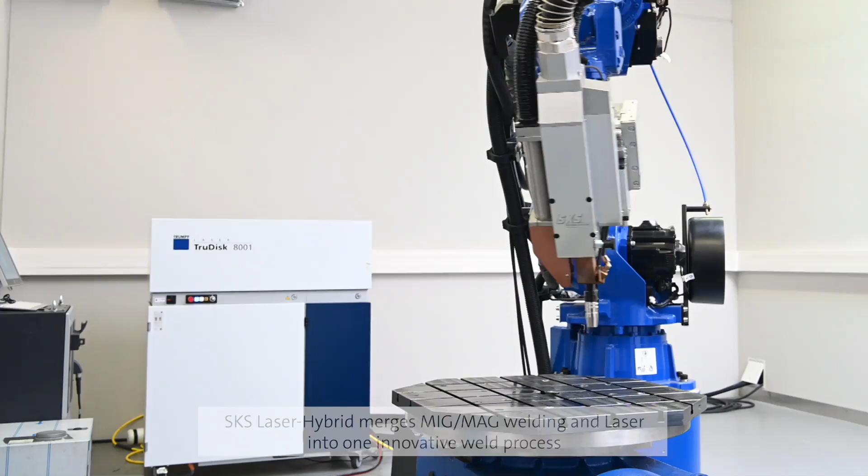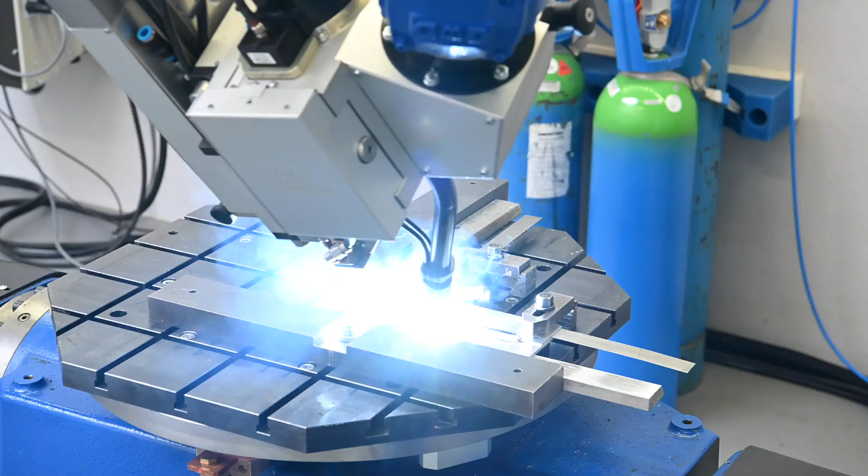SKS Laser Hybrid merges MIG-MAG welding and laser into one innovative weld process for very high welding speeds and extremely stable joints. Laser Hybrid combines the dynamic of the MIG-MAG process with the constantly high power of the laser beam, and thus opens the door for multiple new applications.

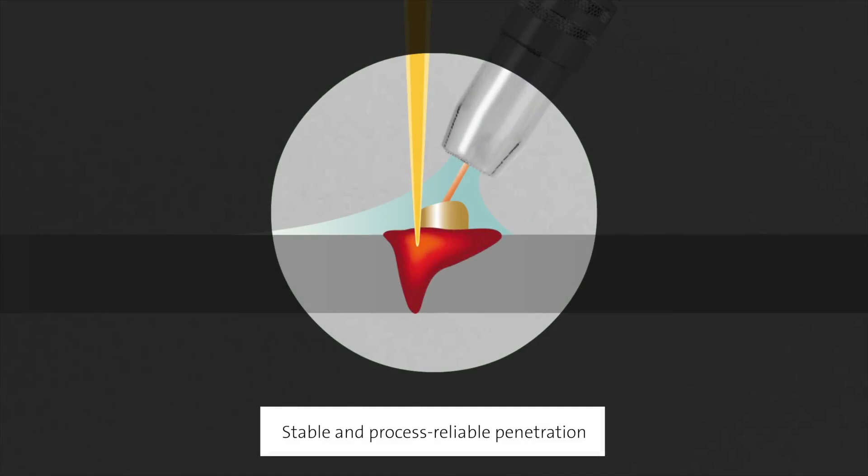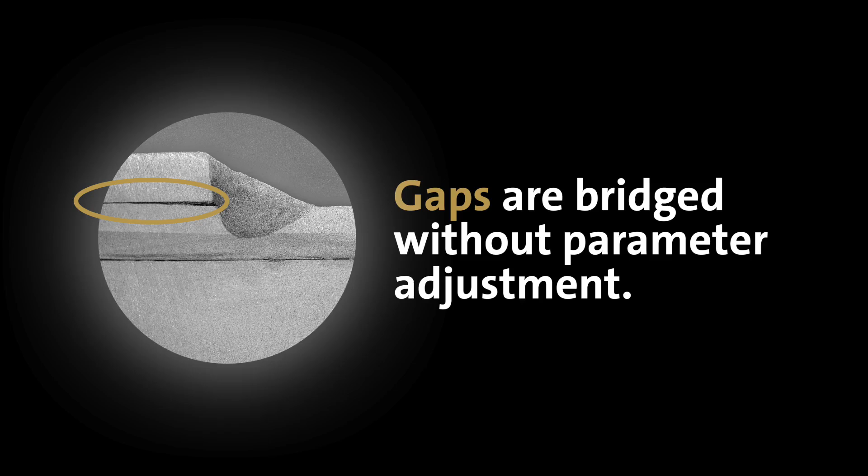In the Laser Hybrid process, the laser focuses its energy on a small area and thus generates a stable and process-reliable penetration. At the same time, the exact amount of filler material is fed into the joining zone with the MSG welding process. Gaps and other component tolerances are bridged in a controlled manner without parameter adjustment and ensure the required seam characteristics.

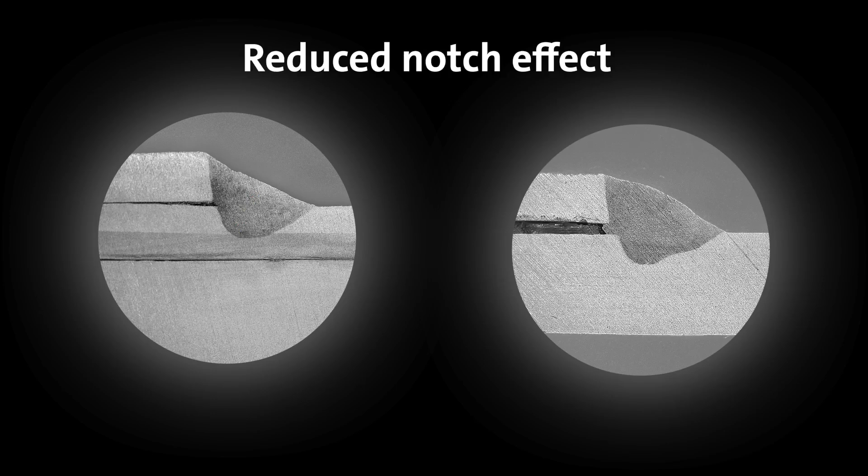Excellent seam quality, visible in the micrograph. Reduced notch effect. Flat weld seams with only low seam rise and deep penetration up to full connection.

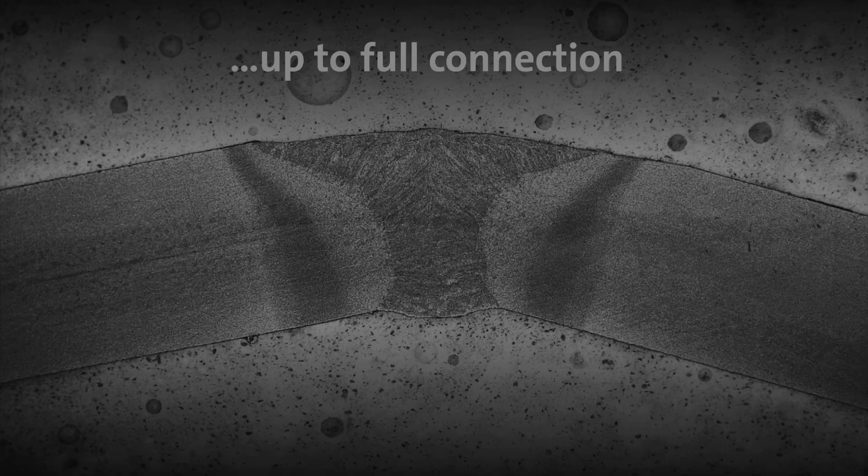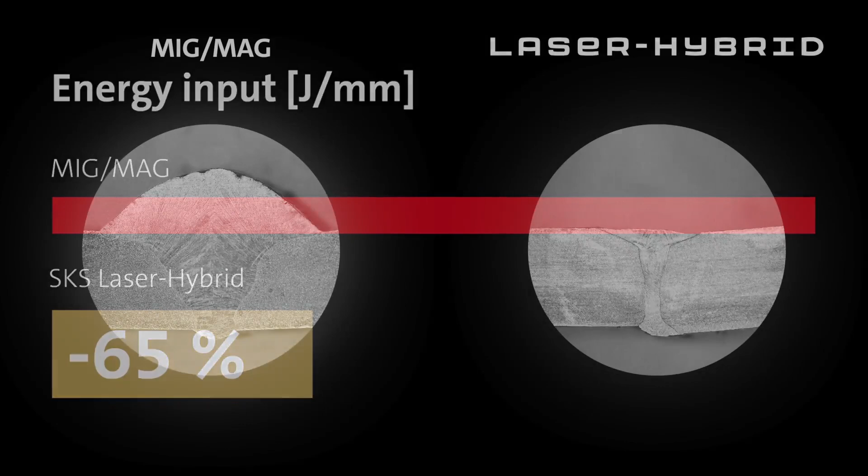Laser Hybrid allows a 5 times higher weld speed in direct comparison to MIG-MAG welding, reduces the energy input by 65%, and lowers the use of filler materials by 50%.

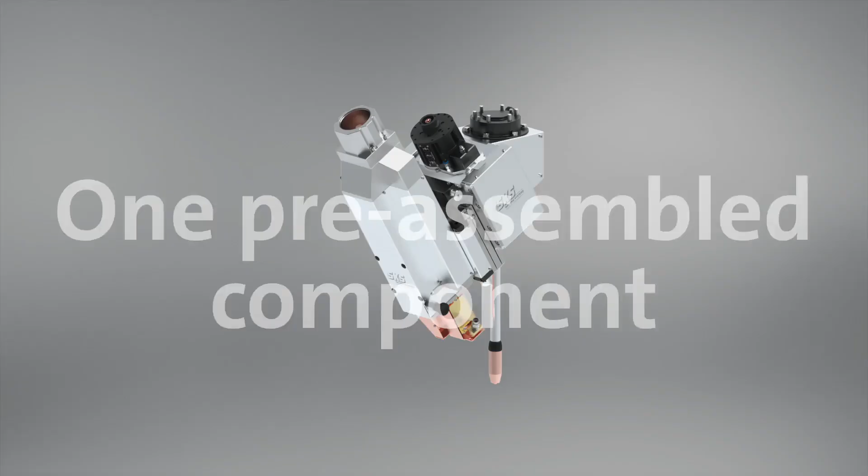We keep it simple. The torch head is supplied as one pre-assembled component in a dust-protected housing. If single parts are changed, TCP is kept identical.

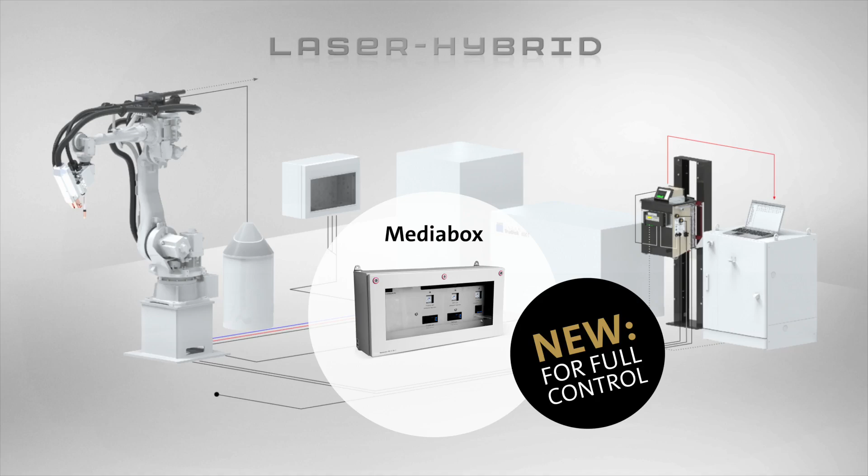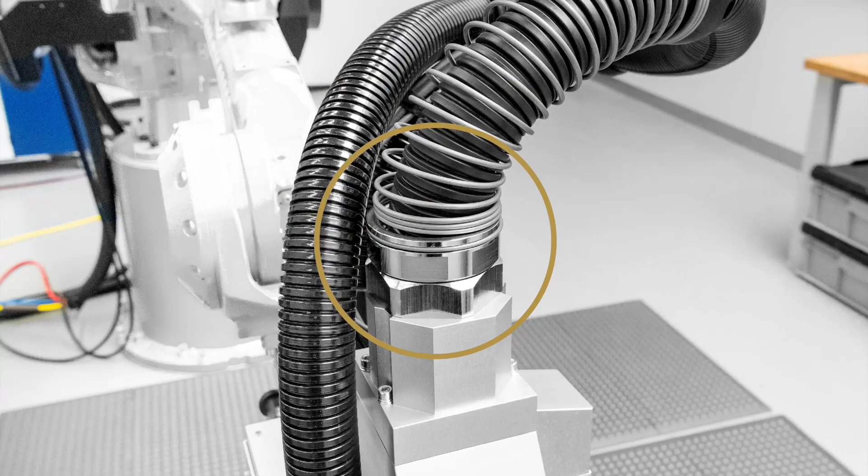The Process Laser Hybrid works in perfect setup with the modular SKS weld system, exclusively realized with components from our standard weld packages. Plug and play. SKS connection kits allow a simple mounting and optimized cable guidance on the robot for high durability and maximum freedom of movement.

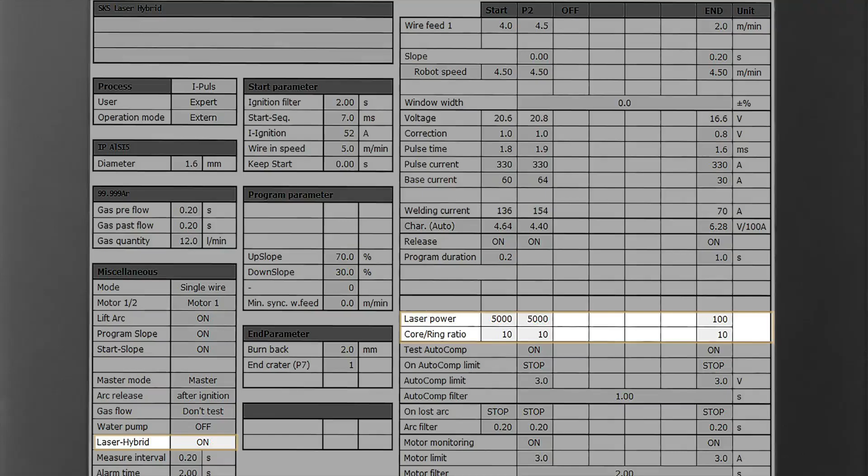Simple programming and process control. Everything in view with the license-free software Q8 tool. The parameter settings and the laser are completely integrated in the SKS software, as well as the documentation of all measures and the robot TCP speed.

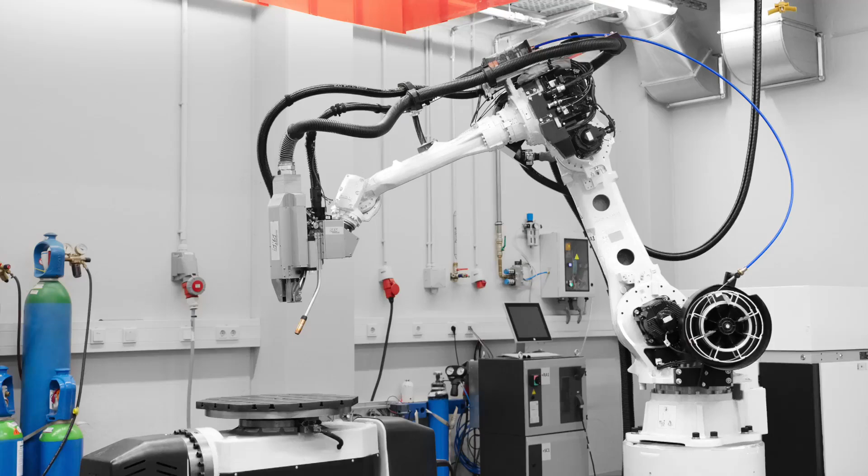Benefit of our integrated processes and functions like SynchroWeld, DP Fast, and a complete data documentation in the Industry 4.0 protocols MQTT and OPC UA. Laser Hybrid with SynchroWeld: all process parameters, including the laser power, are adjusted automatically to the actual robot speed.

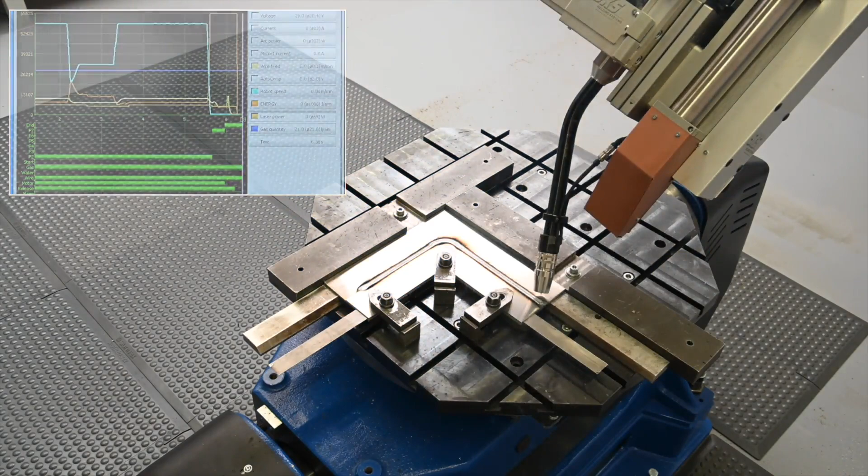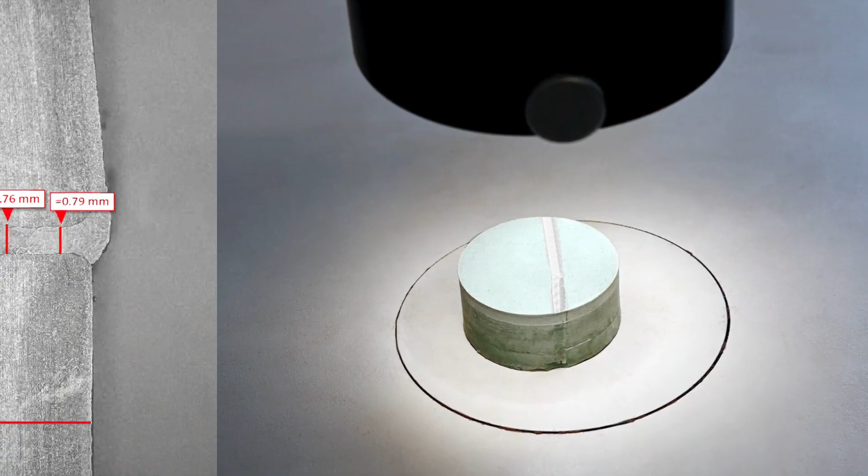Our welding labs for your weld tests. SKS supports you with prototype welds, extensive test documentation, and quality reports.

Laser Hybrid enables new seam geometries, the use of thinner materials with less weight and improved stability and durability. For example, for components such as axles and battery trays. And all this at 5 times the welding speed.

Laser Hybrid. Extended possibilities and efficiency in your production.